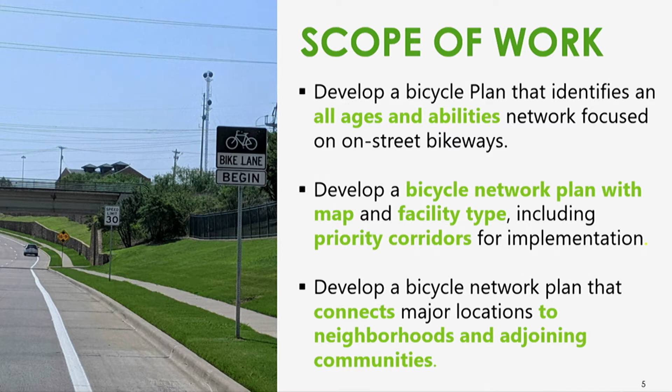So we will develop a bicycle network plan. It'll have a map and the facility type, so what kind of on-street bike facility, including these priority corridors that could be implemented. We'll also make sure the network connects to major locations like neighborhoods and adjoining communities, as well as trails and things like libraries and grocery stores.

So we're going to use what's called a bicycle level of traffic stress analysis, and that scores existing roadways and intersections based on the level of stress a rider would have if they were riding. And then we use that to develop our plan for all ages and abilities.

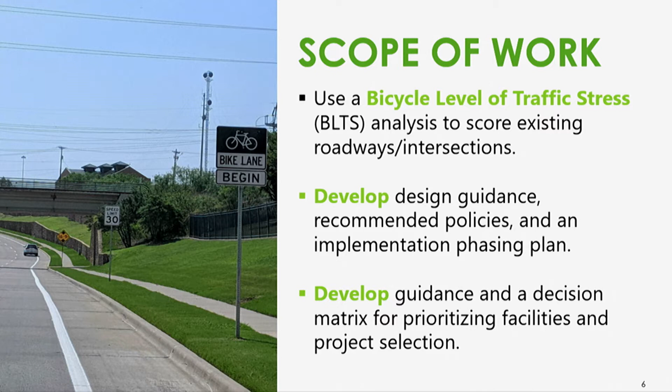So we'll develop design guidance, recommended policies, and an implementation phasing plan, and also develop guidance for decision making that we can then hand off to the City of Irving to implement the plan. So here's our project schedule.

This is our very first public meeting here, and we've been working on data collection in the background, getting all the information ready to put together existing conditions. So after this meeting and after we've gotten everybody's feedback, we'll start on our bicycle level of traffic stress analysis and start working on a draft bicycle network. That'll take most of the summer into the early fall.

Then we'll meet again with our stakeholder committee and let them review the draft network, and then we're going to come back out for public comment period. Of course, we'll revise the bike network based on your guys' feedback. That'll probably be early next year. Then we'll put together the draft bicycle plan document in that next spring time frame. We're hoping, if everything goes to plan, that we can go to City Council for plan adoption next May.

So we're going to talk a little bit about public engagement and public input opportunities. Right now, this is our very first public meeting. This is where we get all of our initial feedback from all of you guys. So where do you guys currently ride? Where do you want to be riding? What are issues that you see? We want this plan to reflect what City of Irving residents and visitors want.

So like I said, there'll be another public meeting, likely early 2023, where we'll give a recommended network and get comments on that. And then a public comment period in late spring for the draft network, policies, and plan for the community to review.

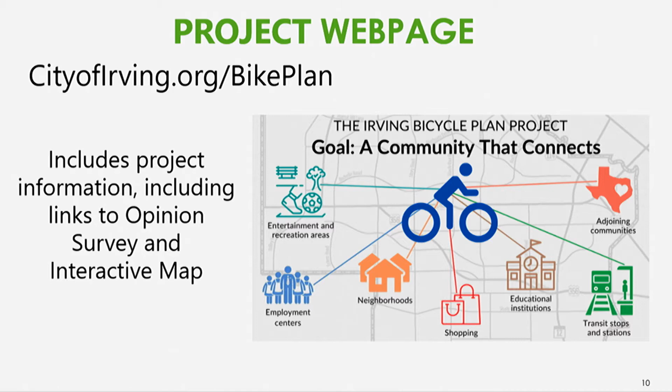So for you to get information on the project, we do have a project webpage. If you go to cityofirving.org/bikeplan, that'll take you to the hub for all of the information for the bike plan. So project info, timeline, and it's got links to an opinion survey and an interactive map that we'd love you all to take time to fill out.

We also have an opinion survey that we have put out there. This is to gauge overall attitudes and opinions toward bicycling in Irving and to also provide direction for developing the citywide bike plan. So there's questions about your current bicycling habits, like have you ridden a bike within the last 12 months. If you click yes, then there's several other questions for you to answer. It asks you about bicycling facilities currently in Irving, and then how can we make bicycling better in Irving. You can access this survey on the website as well, cityofirving.org/bikeplan, and there's a link right there for you to take the survey.

It'll be open for at least a month at this point, so it's open right now, feel free to go there. We've got the link here, but we've also got QR codes around the room that you can scan with your phone to be taken to the webpage.

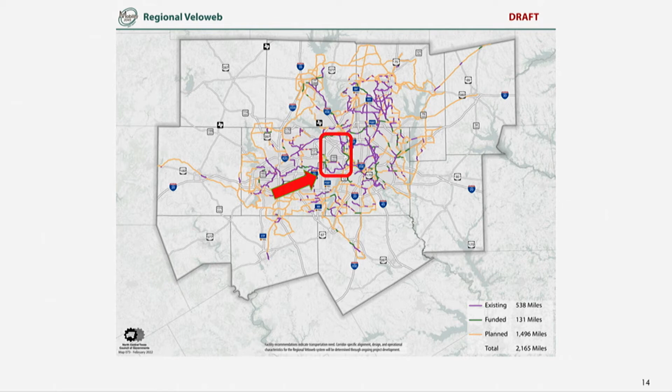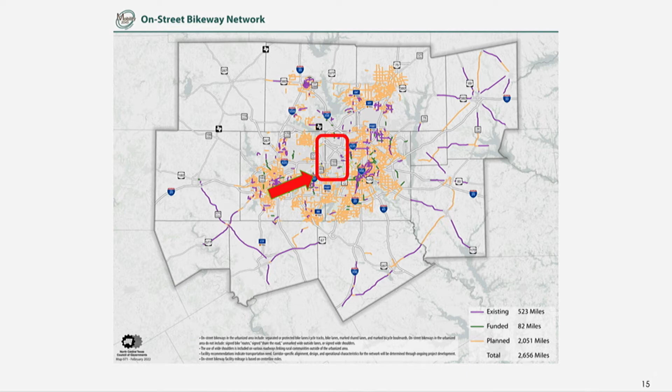So at COG, we keep a database of all of the existing on-street and off-street infrastructure in the region based on adopted plans for all of the communities in our 12-county region. So you can see that Irving right now doesn't have a whole lot of on-street bikeway infrastructure.

For community shared use paths, so these are those that are off-street. It could be a trail or a side path that's all along a side of a road. You can see as you leave the urban part of the Metroplex and get out, there's a lot more shared use paths out there.

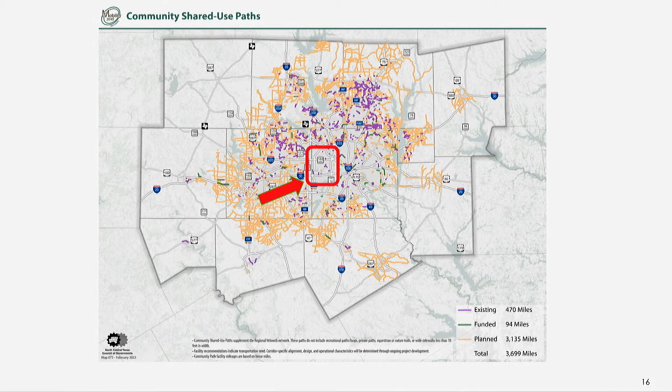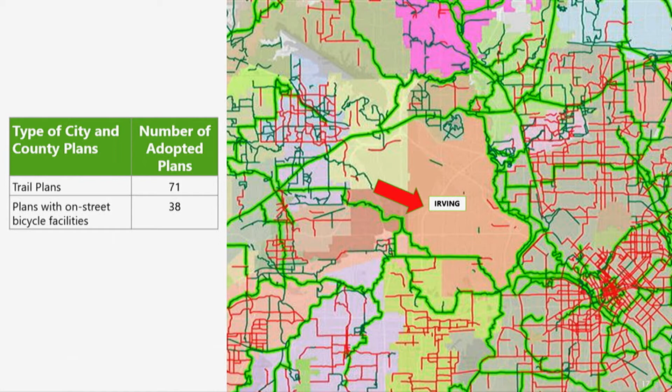You can see Irving is kind of a little donut hole in the region. Lots of cities within the Metroplex do have an adopted plan. As Dan said, we don't have one here in Irving, which is why we're here tonight, to develop a plan so that you guys are no longer the donut hole. I mean, donut holes are great, but...

As I mentioned, there are some regional trails that are in Irving right now. We know the Campion Trail, lots of people refer to this as like the jewel of Irving. Most of it is complete. There is a small section that I believe is funded right now, so that will be getting construction with that funding.

And then our Fort Worth to Dallas regional trail, which we've got some maps in the back to help you with. That is a regional trail that connects Fort Worth to Dallas through various trails throughout the five cities, I believe.

So we also know that there are a lot of barriers to bicycling in Irving, and one of them is that TxDOT roadways can be big barriers to cross because they're just so massive. We've highlighted, we know that there are lots of TxDOT roads in Irving. We're aware of them, and we've been coordinating with TxDOT already to get information from them on what are the future plans for these, where they're at in the stage of development, design, or being let. So that's something we're working on too, because we know those can be big barriers to getting across the city.

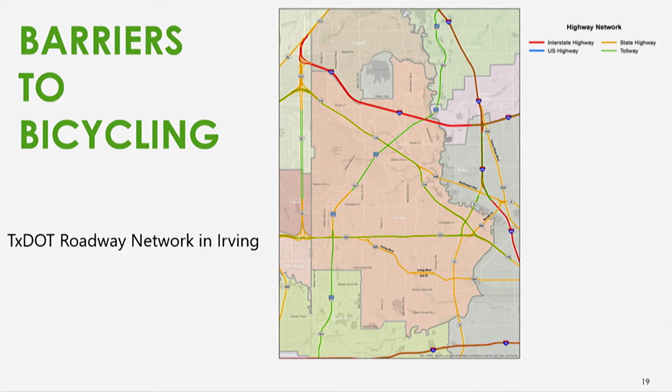So we want to be able to attract all ages and abilities to be able to ride their bike to either get somewhere for work, for school, or for recreation.

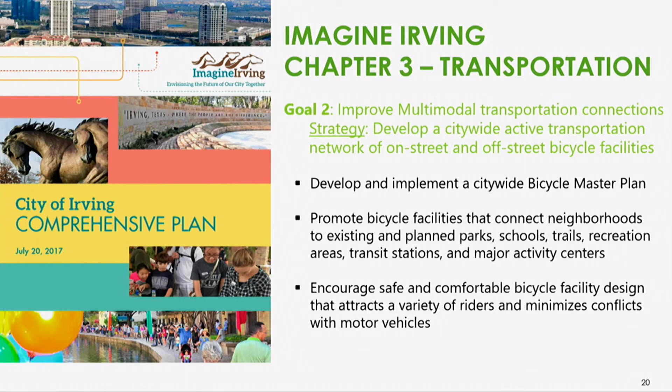So included in the Imagine Irving plan, there was this map that included a potential bike network. Again, this was just a potential map. There wasn't any deeper analysis, there wasn't facilities assigned to these. It was like this could be a potential bike route, bike corridor. So this is something we're going to use as kind of our starting point, since this has been presented to the city, to the community. It is in the Imagine Irving plan, but we are going to do a good analysis, see what kind of facilities should be on these roads. If not this road, maybe another road, but we're going to use this as our starting point as we develop the draft network.

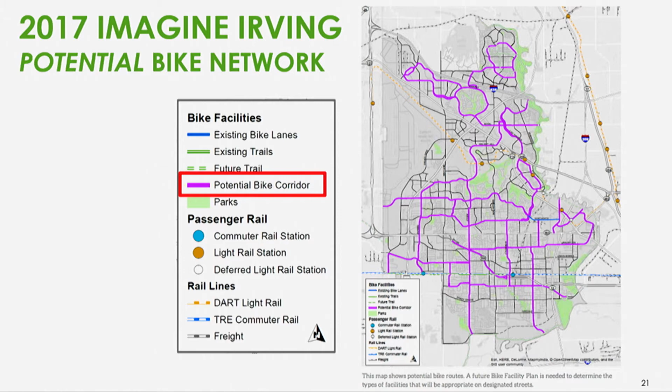It's on the City of Irving webpage. I don't believe it's a map by itself, but it is a map within the larger document.

When the planning process went through for the comprehensive plan, this was adopted in 2017, which meant this started in 2016. This is a map. If you disagree with one of these roads, that's okay. This was a means by which staff used with the consultants at that time to make some very basic connections throughout the town. So it was part of the plan, but without really the input from groups like this, we really need to codify it, people who are using the system.

So if you don't agree with one, this Julie's saying start from here, and that's fine. But if you say, hey, I don't like this road, now's your time. Comment away. And if we missed one, that's okay too. There's lots of roads in Irving, so not one's any more special than the other.

Okay, so this is an on-street bike facility plan that we're going to be putting together. I did want to quickly go over the different types of on-street facilities so you guys know what we have in our toolbox to be able to actually put on the roadway.

We do have a lot of design guidance to help us. We're not just out there doing whatever we feel like. The Federal Highway Administration has put out a design guideline for planning. Also the American Association of State Highway and Transportation Officials, AASHTO, their book from 2012 is the design manual that most engineers will be using. And there's the National Association of City Transportation Officials, NACTO. They put together a guide for urban bikeway design, so for places like Irving that have very urban streets, this design guide can help a lot with an urban facility as opposed to something more rural or suburban.

Also, TxDOT has released their roadway design manual that has information about bike facilities on TxDOT roadways. And what's really important to note is that context really matters when you're selecting what kind of on-street facility you want to have.

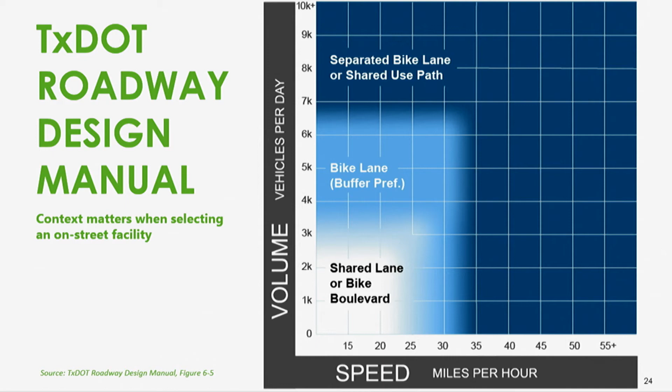So lower speed, lower volume, you need less separation. You could have maybe a shared lane marking or a bicycle boulevard. But as soon as you get more speed or more vehicles per day, you want some sort of separation between people who are biking and people who are driving. And as you get even more volume and even more speed, you want even more separation so that people stay safe. We'll be using this as a guideway, knowing that context really does matter when selecting which on-street bike facility to use.

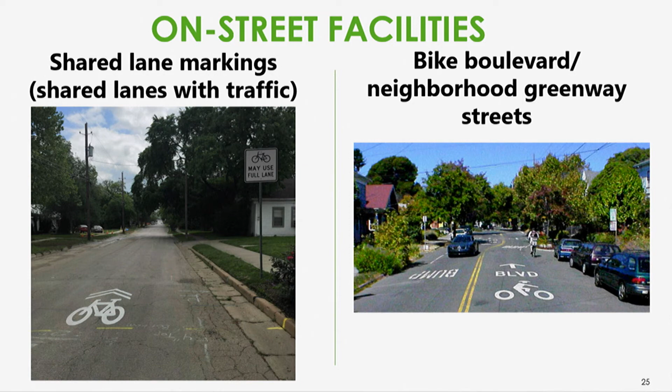Also, bicycle boulevards, sometimes called neighborhood greenways, are also items you can do on-street for low speed, low volume. Generally, if you want it to be a bike boulevard, you're also doing traffic calming - maybe putting in a small roundabout so traffic goes less fast, or other traffic calming measures so people aren't going fast on that street, making it very comfortable for somebody who's riding their bike.

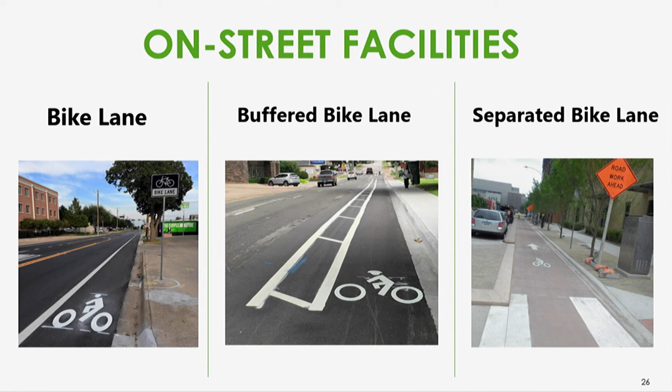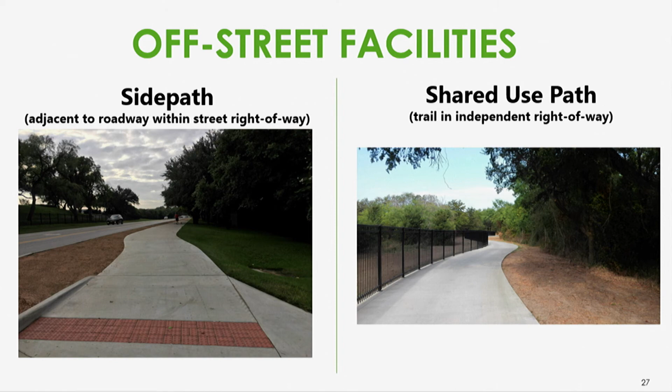And then shared use paths - those are items like the Campion Trail or the Delaware Creek Trail - we want to make sure that our on-street facilities connect to these independent trails.

And there are tools that are not considered great for urban bike facilities. So if it's just a signed bike route that says share the road, or this green bike route sign, that is not something we would want to put or recommend for an urban bike facility. Also, wide outside shared lanes, where the lane is 14 feet wide and you're meant as a bicyclist to share that outside space - again, that's not recommended for urban context like Irving, but it is recognized as an actual facility.

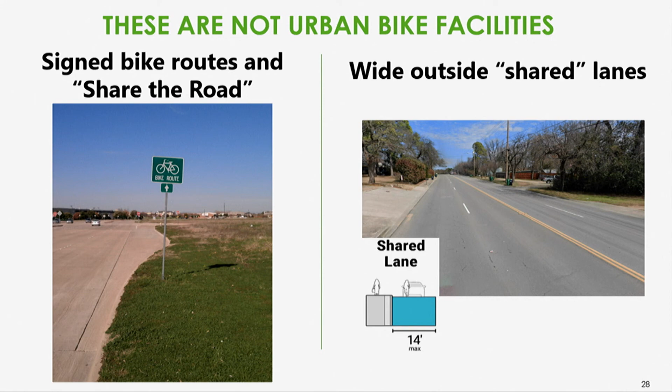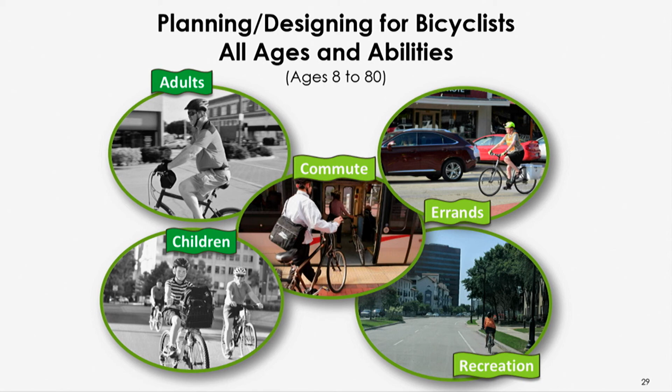So overall, we want to be able to use these tools in our toolbox to plan and design for all ages and all abilities. The phrase we use a lot is from 8 to 80 - you want your grandkid, your grandma, to all feel safe on their bikes so they can use their bike to get where they need to go. Whether it's adults or children, whether you want to commute, run errands, or even want recreation, like getting to the Campion Trail, we want to make sure we're designing a bike network that accommodates all ages and all abilities.

Okay, so that brings us to here and why we need you guys here and why we need your feedback. I'm going to explain what we have in the back room. We have a section about our plan, vision, and priorities. We want you to tell us what you think the plan should have as our vision, and what our priorities should be. We've got poster boards in the back where you can write on a sticky note saying what you think the vision should be, what your priorities are, and tell us where you want to bike.

Do you want to bike to work? Do you want to bike to school? Do you want to bike to a grocery store? Do you want to get to transit? And then, what are the priorities? So we've got those three maps, poster boards back here.

And then we've also got two printed out big maps. First we have one for existing bicycling conditions - so if you're currently riding, we want you to pull out a marker and start writing on that map about where you want to ride, or where you are riding currently. Then we have another map for future bicycling opportunities - so maybe you're not riding there now because there isn't a bike lane or you don't feel safe, but you think it's a great opportunity to put something there. Put that on the map as well. So we've got those two maps.

If you don't feel like writing it out here tonight, these maps are also online with the interactive map that I talked about earlier. So you could also do it on there - just drop a little pinpoint with your mouse. But we also have them here.